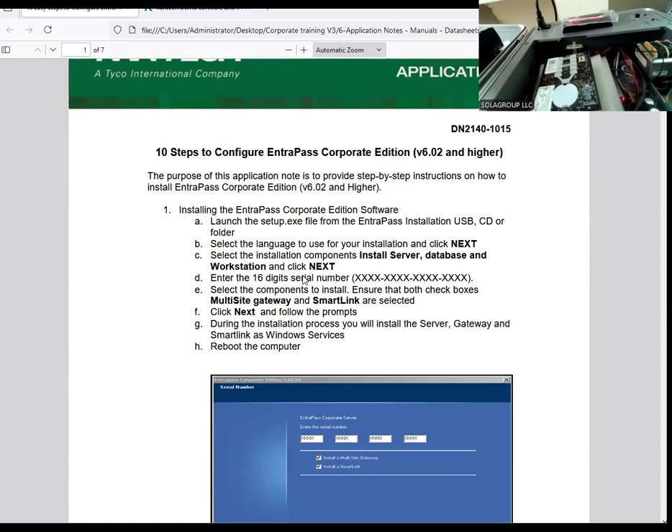Step one is to run the installation software. In the normal EntraPass, once you run the installation software, you're going to get a screen like the one you're looking at here. That screen is where you add the license code.

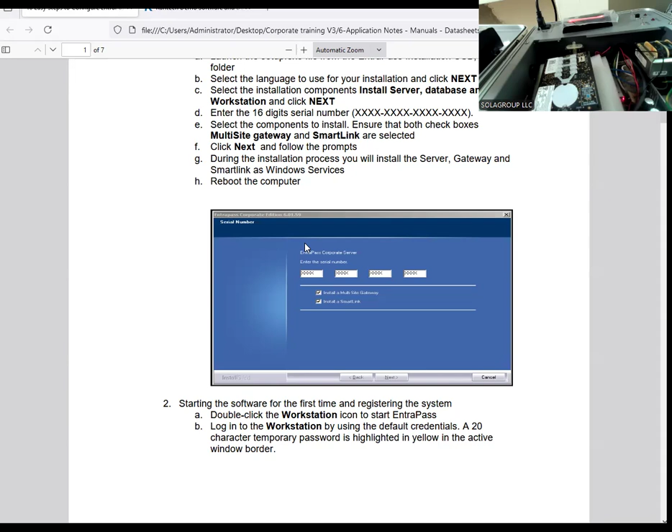So when you buy the kit or the solution, you have a soft license. It comes by email, or if you have the box pack, you have a USB inside with the code. So you add that code and hit next.

After that, I'm just doing a review, so you know this already. When you start the application for the first time, you'll get a funny yellow password. You enter that, it doesn't matter if it's capital or lowercase. After that you hit OK, and you'll end up on that screen here.

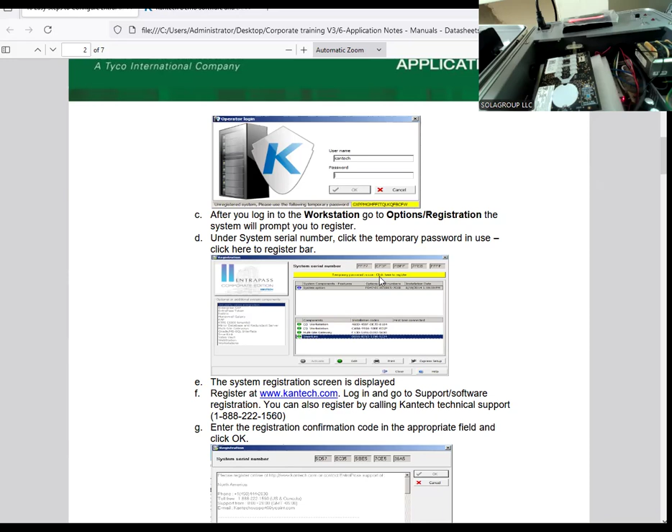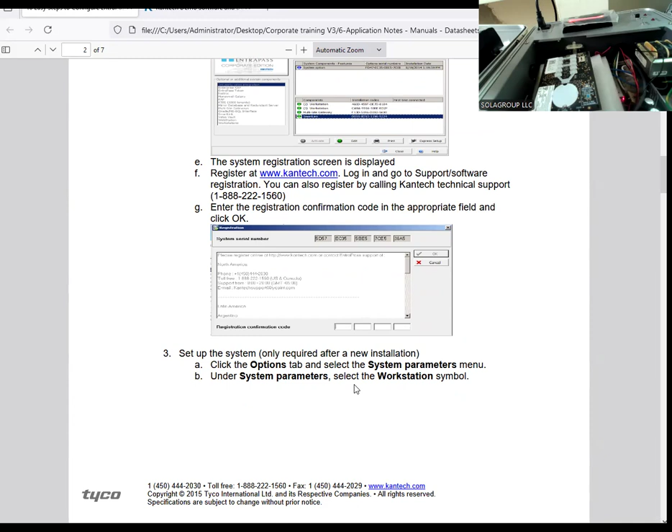There is a button saying click here to register. So then you go through the registration process to get a confirmation code. You enter the confirmation code and you're good to go. I explained that part because since we're using the demo version, this part is not there - you will not be able to see it.

All right, I'm pretty sure the software is downloaded already, so let's get to the download. I even have it twice - yeah, I did download it before.

Okay, so we're going to run the software. We're starting the installation. We're going to do everything together. Let's wait for it. Windows asked, and I click 'yes' anyway.

My software is asking here, showing that we're about to install the 8.51, which is the version available in demo mode - the latest version available in demo mode. That will allow you to set up and do all your tests. You can add a controller, add up to 10 cards. You can even do integration testing with a video system, integration with an intrusion alarm system. You can test your mobile application, EntraPass Web, and EntraPass Go. It is very, very useful, and you can play as long as you want and practice.

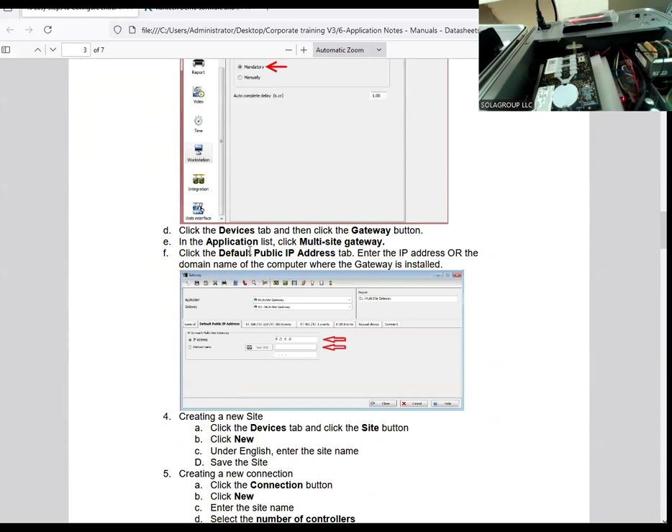After the installation is done, we will start the software. Then we have a couple of presets. We'll make sure, for example, we need to confirm the IP address of the server gateway and add it there. We're talking about the multi-site gateway, the EntraPass gateway. Then we'll start after that with creating site, creating connection, and so on. So that's pretty much after the installation is ready, we'll start the software.

Then we will go to make a configuration. It's a quick config. It's about helping us always get our site and connection at the right location. We'll go to option, system parameter, we'll go to workstation, and we have some options there. For example, whenever we're creating a connection and about to save it, we're able to set the software to ask us, do you want to save that connection in a site? It can ask, it can be mandatory, or it can be up to you to remember. So we can set it as mandatory, so there's no way we're going to forget, because the software will make it mandatory to add the connection to a site.

And so on. Since we're going to see that together, let's see how we're doing here. Still working on getting the software ready.

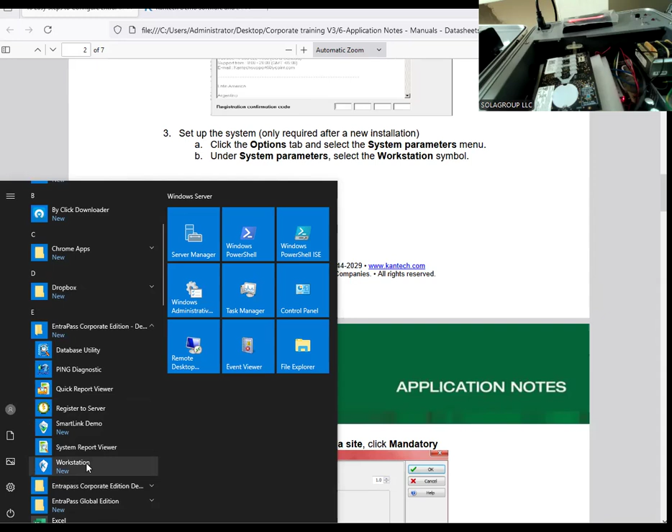All right, everything installed. Now we need to finally start with software setup and configuration. I have a couple of other software there, as I told you, remember. So we'll go with the EntraPass Corporate Edition demo. In that case, all you have to do is get the workstation and run it as admin.

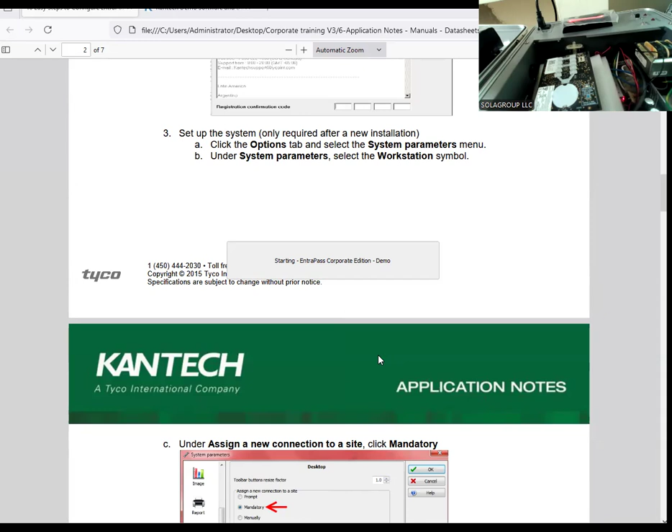We do have another video on how to prepare your computer. I'm pretty sure you know that one, but just in case, we're going to add the link for you so you can review. This computer has already been prepared, which means you need to have local admin rights, you need to add the port in firewall, and in case your antivirus also has a layer of firewall, you need to add the port in and out. All right, so those have been done, but we have a separate video to assist you on that, to remind you how and what needs to be done.

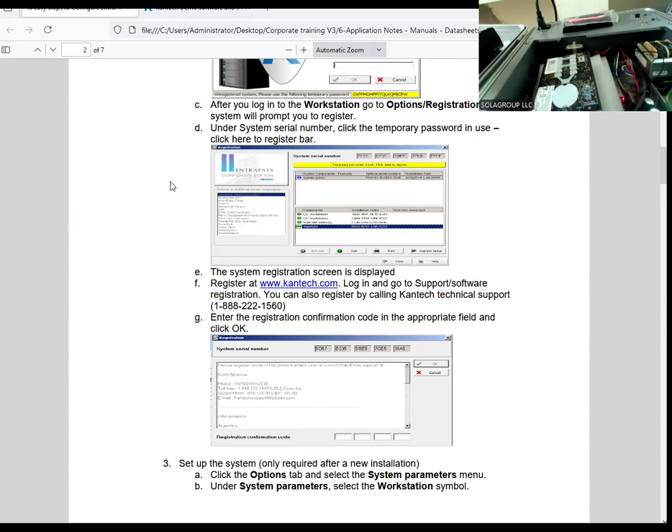All right, so right now we're moving forward and waiting for the software to be ready for us. Then we'll go with those steps. Since, as I mentioned, the demo version doesn't require registration, so we'll go straight into this part here whenever it's ready.

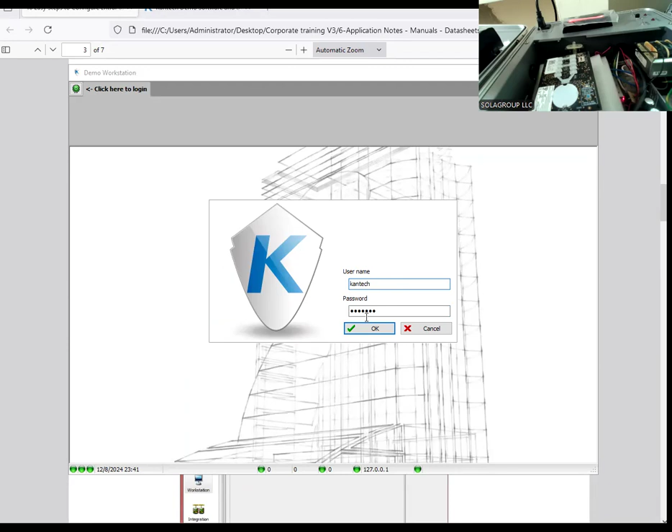As you'll find out when using the demo version, the login information is already added for you. You only have to update your password. Make sure you update your password accordingly, and then you will be good to go.

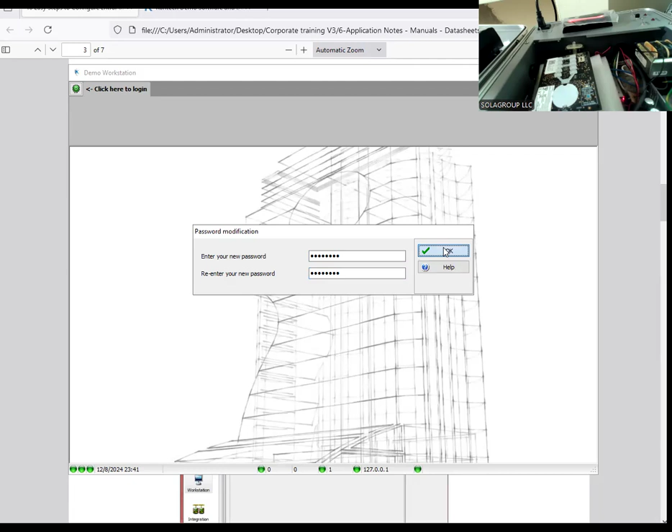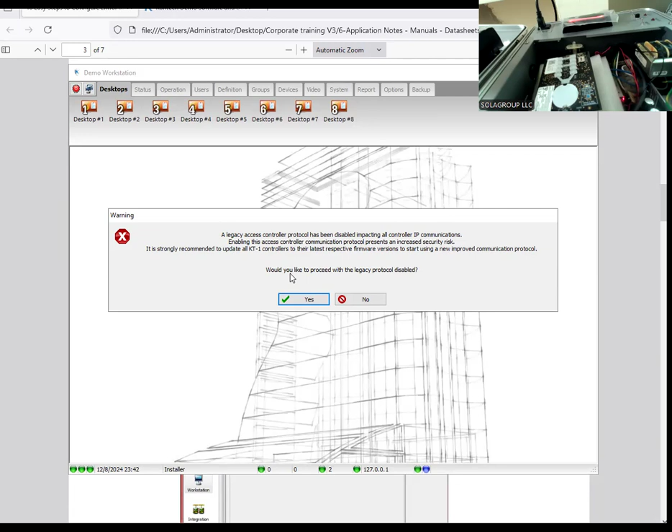Now we have a message here about the legacy controller. If you only have new controllers for KT1, KT2, KT4, or KT400 with updated firmware, you could just say yes and leave it disabled.

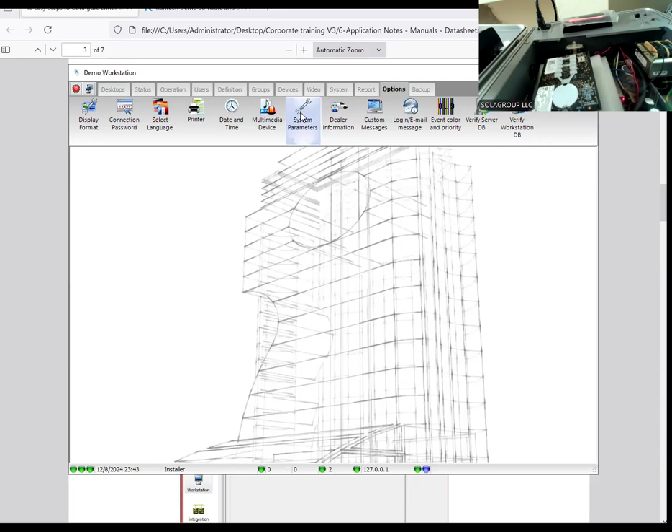Since version 8.40, there's been some tweaking to make the security protocol tougher, and by doing so, the old controller will not communicate. However, if you have older controllers like KT300, you need to go to Options, System Parameter, Firmware, Gateway, and enable Legacy Communication. Enabling this prevents certain security improvements, but by doing that, you will have communication with both older and newer controllers.

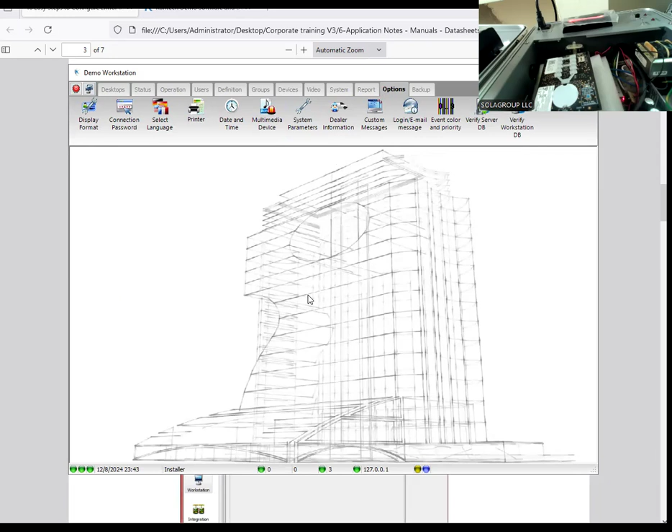Okay, fine. Now let's go and follow the steps. We are at the step to get your system assisting on configuration when creating a site. So we go Options, System Parameter.

We'll go to Workstation on the left, and here we can set it to mandatory, or we can set it to prompt. Prompt will ask you, mandatory will make it mandatory for you to add it to a site. Okay, so we have that taken care of.

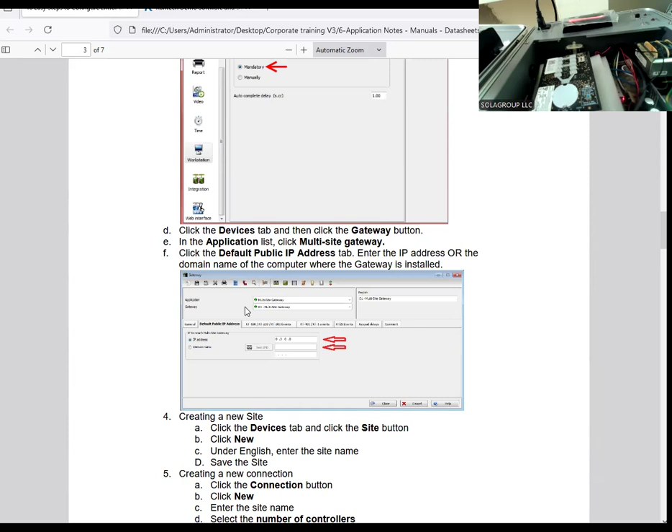Then we need to get our gateway IP. Remember, by gateway we're talking about a component of the software called gateway. So we go Devices, Gateway, and if your gateway is running, you come here. Normally a double click should be enough.

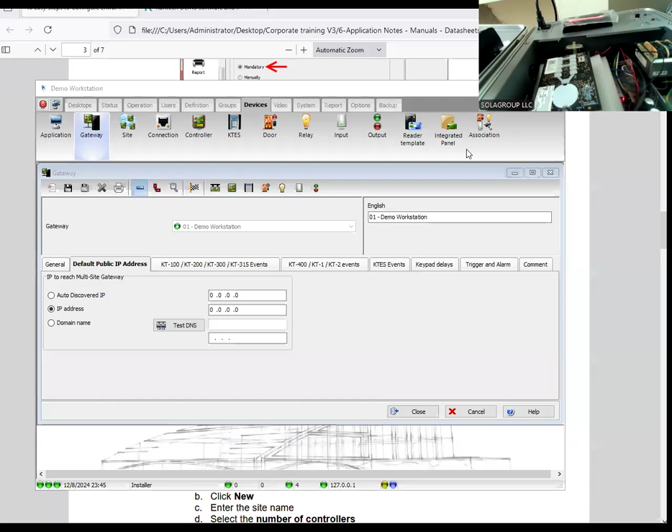Now, if the gateway is not running, you can check the IP. For example, you can do an IP config on your computer, or you can come here and it will show you the current IP detected on your computer. If you have multiple IPs, you will have a drop down so you can see.

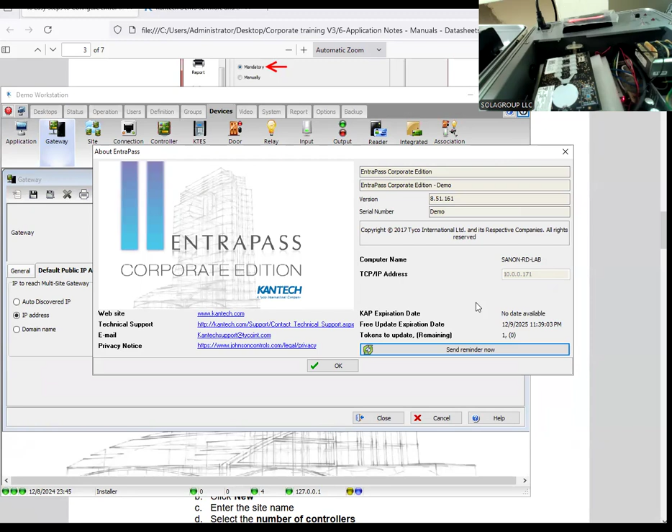So now, whether you have multiple IPs or one IP, you need to select the IP on the network you're going to use. In my case, very simple, I just have one IP. So here I'm going to add my IP information and hit save. That's it for that part.

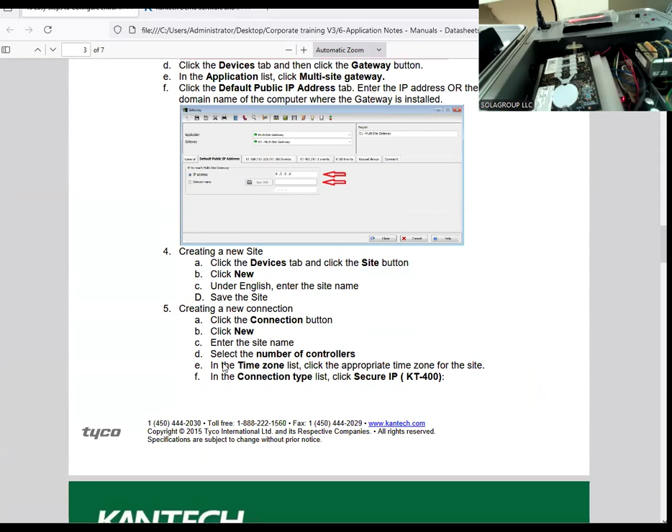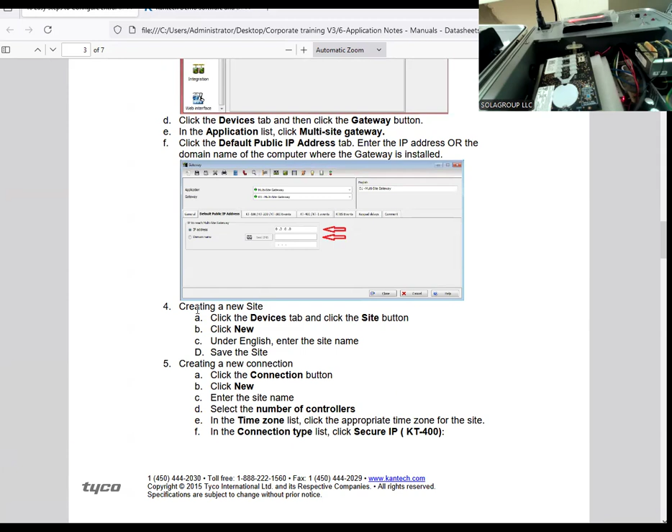Okay, since I'm following the step-by-step guide, what do I have to do next? Then I have to create a site. Remember, to create the site. How do we do a site? A site is a logical component. For example, you have different locations or different departments, and you could group them by site.

In corporate, when I go to Devices, Site, we could have multiple KT1 controllers over IP. Let's make the example differently. For example, we have a 6-door system, and unfortunately, because of distance or rules on the location, we're not able to have the controllers in a daisy chain, inserting one controller cable going to the next and so on. So we end up having to create multiple connections, because every time we have a controller over IP, it is a connection. So what happens is we have one system, one site really, but because of the situation, we're not able to have them in one loop.

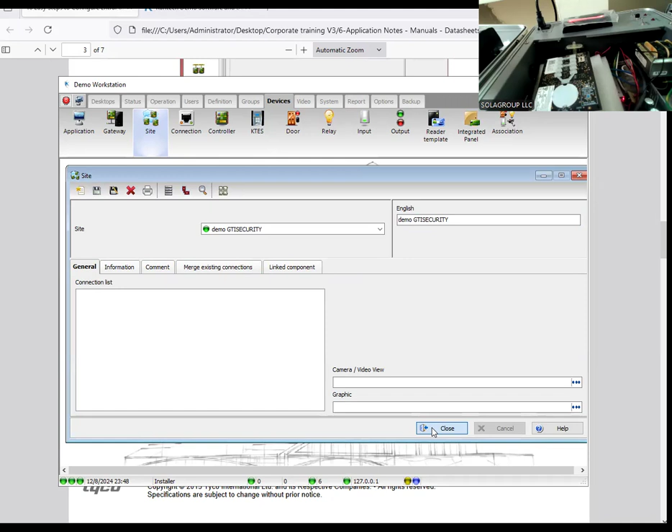So the site is not really a physical component. Like I said, it's a label allowing us to organize and group your connections for better organization, especially when you're going to create access level permissions for users, since those are by site.

Okay, now we're going to create a connection. So I go to Devices, Connection. I hit New. Then I'm going to say the connection is, I have a demo KT1. Okay, so you set your time zone, and here that's the physical equipment that you have.

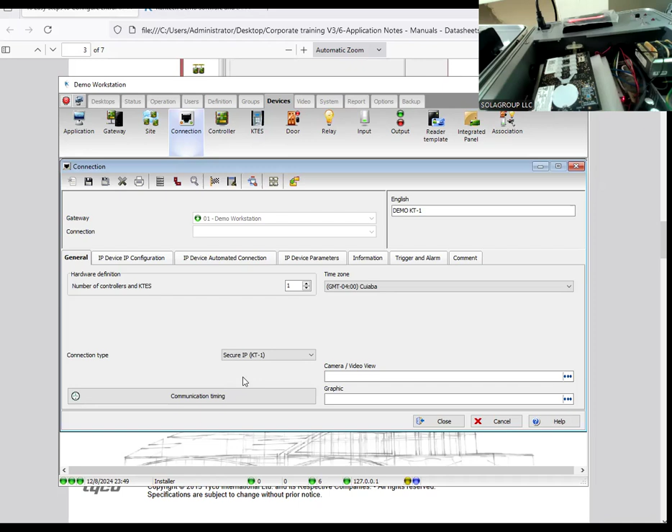MAC address is 5F. I only need the last 3 because the first 3 pairs are always the same. 0E and 53. All right.

Now I check to see if my server IP is correct. Yeah, it's correct over there. Cool. Now I'm gonna hit save, so I'm saving the connection, and here we go.

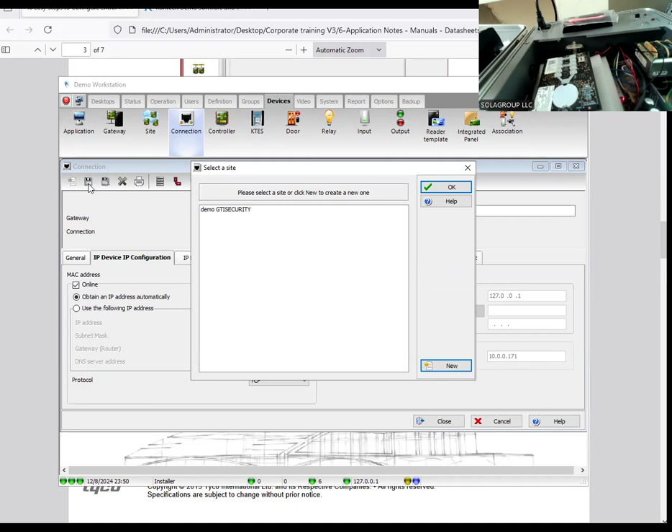Remember, we made a setup at the beginning where we asked the software to assist us, making it mandatory for us to select a site. That's why it's asking you to select the site. If the site was not created yet, we could just select new and create it.

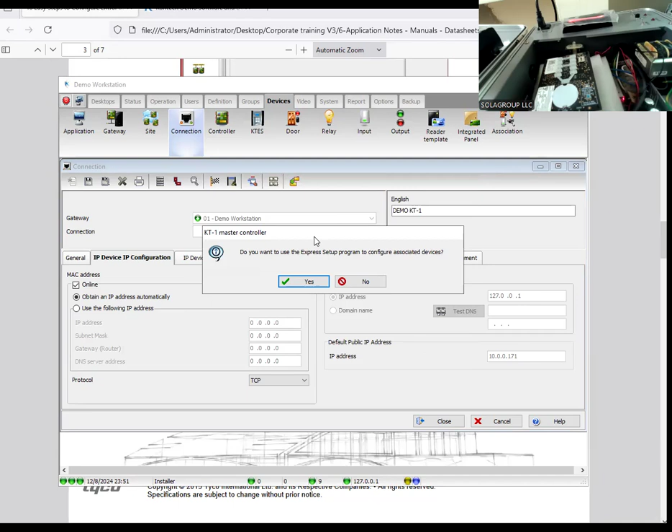Since we had the site already, we select the site and hit okay. Then we have Express Setup. I'm just gonna go ahead with Express Setup because I'm sure you know about it. If not, we'll add the link for you to review, because we have a video dedicated to Express Setup. So I say yes, and I'm moving with the programming.

Now take a look, I'm going to change the name here and look what happened when I change the name. Demo main entrance, for example. So now while I'm adding the name of the door, you see all the related components.

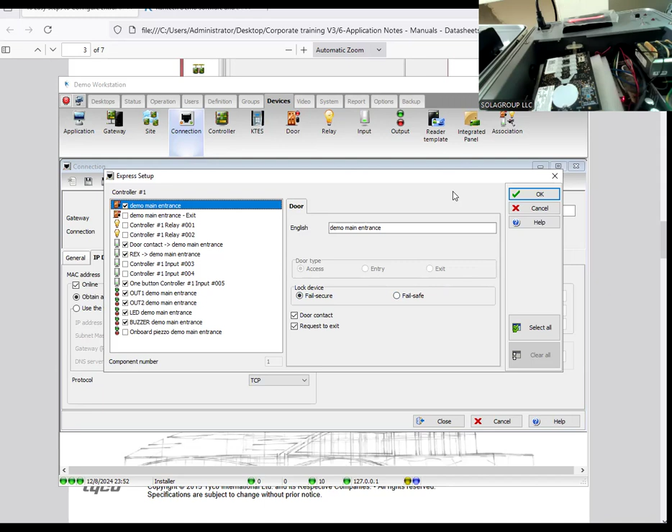That's one of the amazing things in Express Setup and a lot of other things. For example, I could set already what type of lock I have, fail safe, fail secure, everything. We can do everything there while you're in that screen. So since I'm done, I'm gonna hit OK.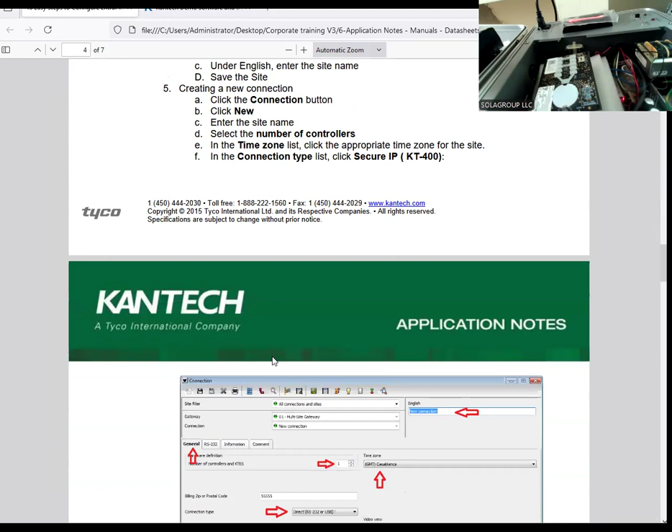And I have my controller, my connection set and ready to go. Of course, we still have to get ready on the communication part. So I have the connection. All right, here is the connection created.

Okay, we had the Express Setup, we just did that, we had that screen here. Since we're using a KT1, the screen was different. The Express Setup screen came according to the equipment that you have. If you have a KT400, it's 4 doors, or you have 4 sets of selections and stuff like that. Okay, then the next step is checking the communication status.

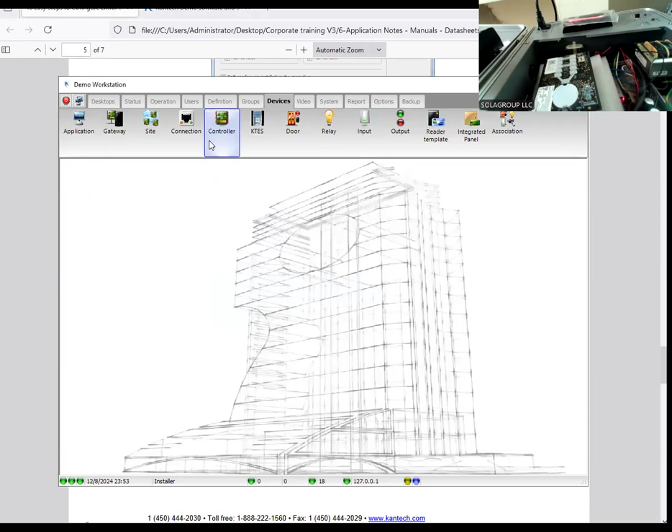We're going to see how we're doing with communication. I'm pretty sure we're not doing so good because we did not prepare the equipment yet. So here I have IP device communication fail.

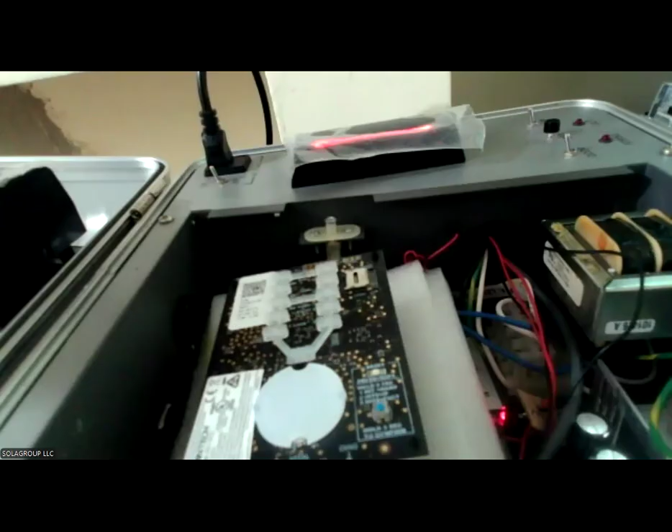That's when we're going to play with, let's see if we can see the camera better. Yep, I'm pretty sure now you're seeing the camera. Okay, I hope so. Let me adjust the camera, then we'll put it back the way. Yeah, I think it's good like that. So you see the reset button and so on and so on.

And we'll be doing prepare the equipment together. Okay, now we're going to get the equipment ready because right now we have to get into the equipment and the dashboard, if we call it that way, to program it. So let's see how that's done.

Normally, if you have one button to do everything in the controller, so I'm going to do what we call a factory reset. The way you do the factory reset is stated in that label here. So we're going to put the controller in programming mode, then we'll make the selection, then we'll confirm.

How do we put it on programming mode? You press and hold for 3 seconds, and the controller will do 5 beeps, beep beep beep beep beep, asking you what do you want. And you're gonna say, okay, I want to do a reset.

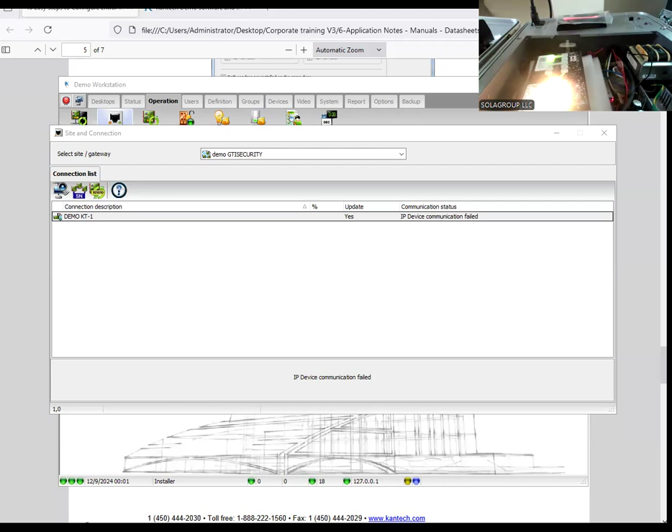All right, so that reset we just did also pushed the controller on DHCP mode. Now, while the controller is on DHCP mode, okay, so now we're going to see what can be done. Since it's on DHCP mode, which means it will grab an IP on my network right now, there are multiple ways of finding what IP the controller got.

We're gonna try some ways. All right, so of course you could use an IP scanner, or you could ask the admin of that network. Oh sorry, HTTP. I'm going to show you something here.

All right, let me show you. No, that's not what I need to show you. No, one second.

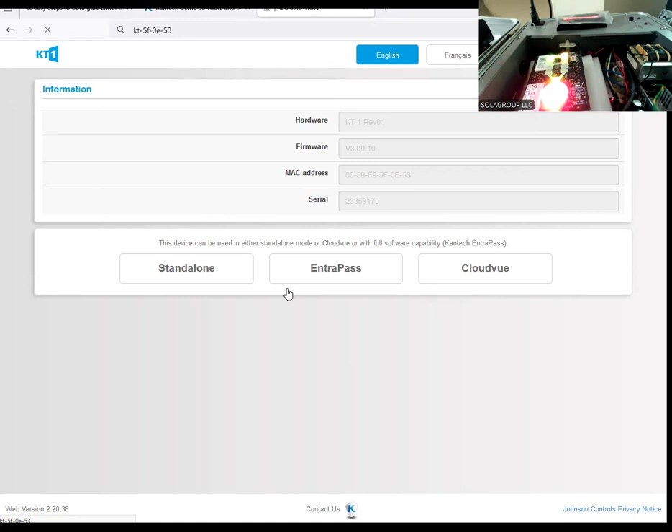So I'm going to type HTTP, then here I type /KT, then the last 3 pairs of the MAC address. In my case, it's 5F0E53. Normally, by doing that, I would get to that page. All right, and it's asking me some setup, you do what needs to be done, and then you access the controller.

Cool, now I am in the controller. How did I do that? I typed HTTP colon /KT dash, and then the last 3 pairs of the MAC address, and by doing that it brings me here. So normally it brings me to a page where I select EntraPass. Then when I select EntraPass, since I'm in the same network, the software already pushed the configuration in. That's why you end up that way.

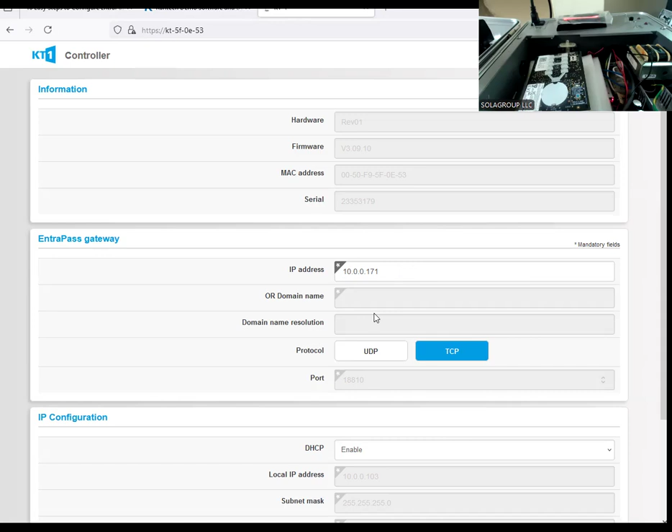But normally I should be having EntraPass, some selection there to make. After the selection, I will add the IP of my server where the gateway is. And since my controller was made on DHCP, I don't have to change anything, and I hit save. That went very fast. Since I'm in the same network and I programmed the connection already, it was able to get in touch with the controller and say, hey, come over here, and I'm already communicating. Cool.

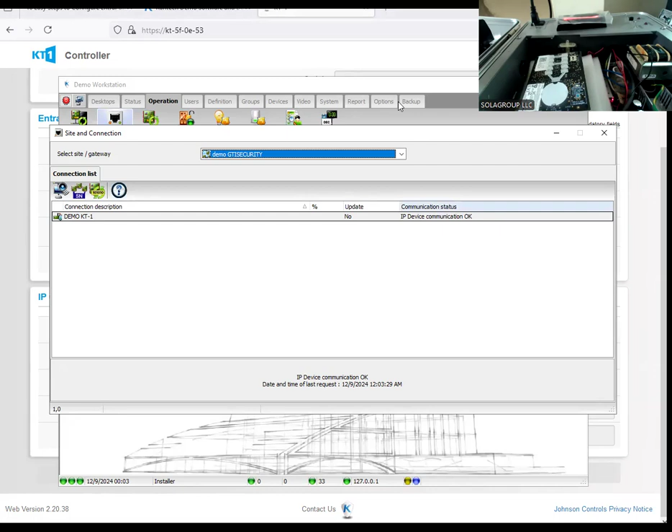So we have the communication. Oops, that's not what I want to do, I want to close this one. So we have communication with the controller. All right, so I have my controller communicating.

I could... let me see... try a card since I have all my wiring and my reader connected, and nothing is happening. Why did nothing happen? Because right now I have my reader connected RS485 to the controller, so I'm still having something more to do. When you have the reader connected RS485, you have to add the reader. There is one more step to do.

I have to go to Devices, Controller, and I will have to add here, for example, the serial number of the reader, because now we're using the reader in smart mode, remember. So on the back of the reader, I have the serial number of the reader, and that's what we're going to add here.

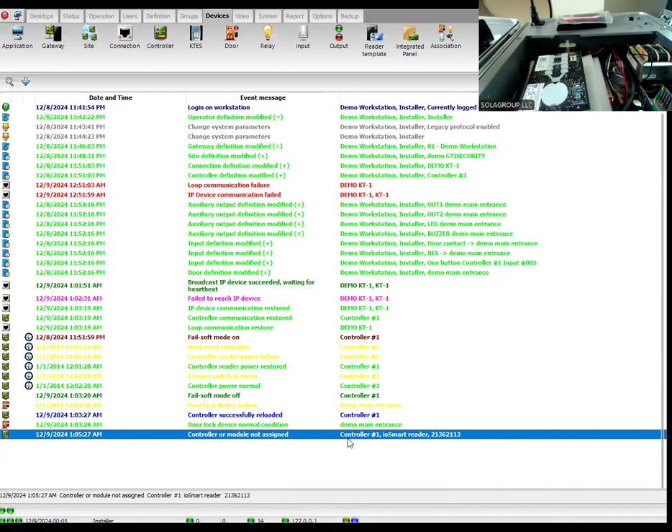Okay, now, since everything is connected correctly, you can see here... you know what, give me a second, let me change this here. I like it better like that. Bang, okay.

So here you see there is an event coming saying controller or module not assigned, and it shows me the serial number of the reader. And since I really like doing right click, let me show you: I go and do right click and I say edit, and I say, you know what, assign. Let me show you what will happen. It will automatically assign the reader to the controller.

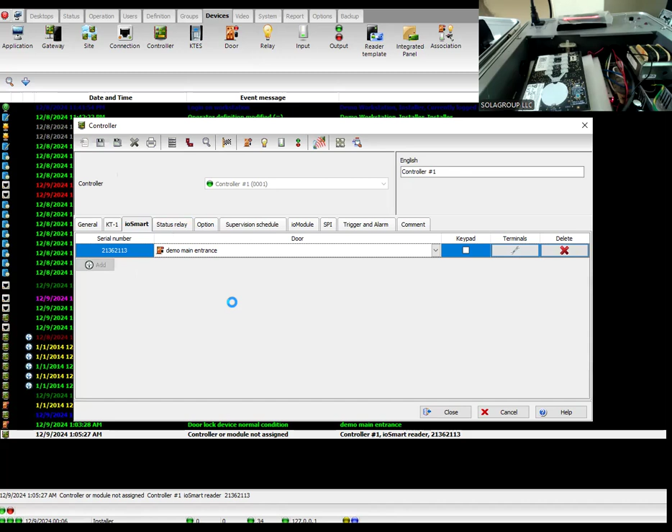If you have, for example, since it's a KT1, I just have one door setup. But if it was a KT400 or a KT2, I would have to select which door that reader belongs to. For now, I don't have to do that because I only have one door anyway. All right, so my reader is added.

Now let's do some cleanup here. For example, here I have something saying controller. I don't like to have my programming with controller 1, controller X, controller Z. We should take the time, it's a couple of seconds sometimes, and add the name. This is KT1.

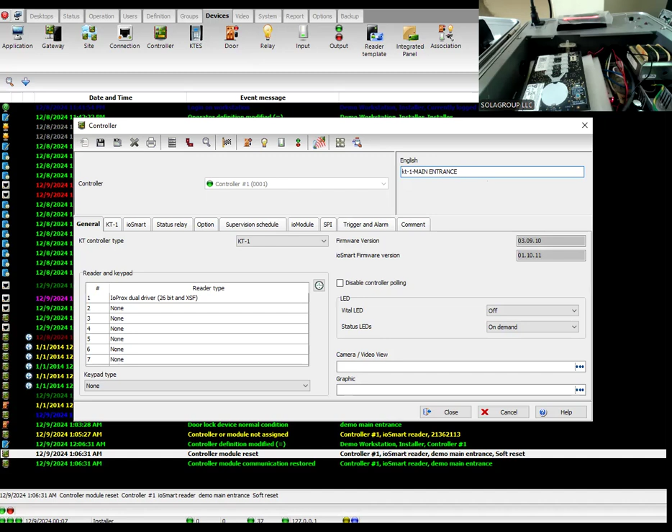And in my case, of course, I'm sure you have your naming convention. Ah, what's happening here? I guess my keyboard... okay, we leave it that way. All right, all right, all right.

Now I'm going to review my controller. I go to Devices, Controller, making sure my format for the reader is okay.

I'm going to add, because I have the IO Smart... actually, you know what, let me add it. Oh, what did I do? Oh, I pressed escape. Let's get back then. I'm going to Devices, Controller, and I have IO Smart XSF. That's what I have right now.

So you set up your reader. I mean, of course, I could do that after. Let's see what's the step telling us. Are we done with this?

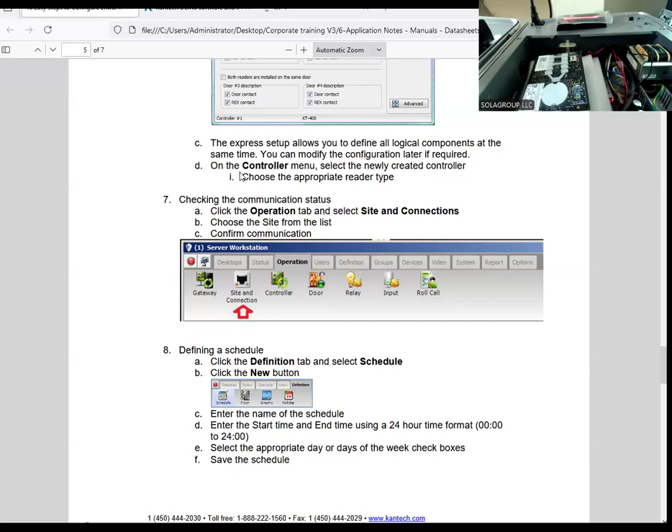Where were we? Here, okay. So we do have controller added, we did verify we have communication, then we're going to move forward with the programming. So right now, review: we have created the site, we have created the connection, we have a connection ready, we have communication. And of course, what would be very useful would be to test. Actually, we can do some cleanup here.

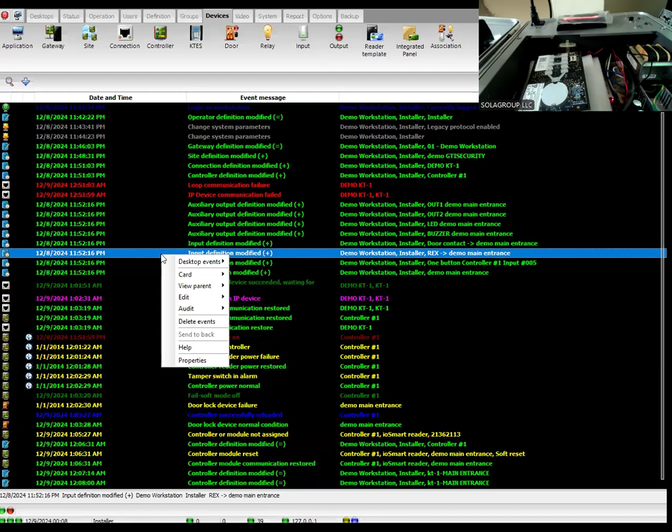We don't need that many. What I just did is a right click and delete event. Those events are just deleted in this desktop, but they're still in your event log for reporting purposes. So I swipe and I have access deny, card unknown, which means it's working.

It's important to make sure all your components work before you start moving forward. For example, here I have the door. Since I have a door contact, it will be wise to force my door and see the door contact is working. Wonderful. I also have an exit button, and request to exit is there.

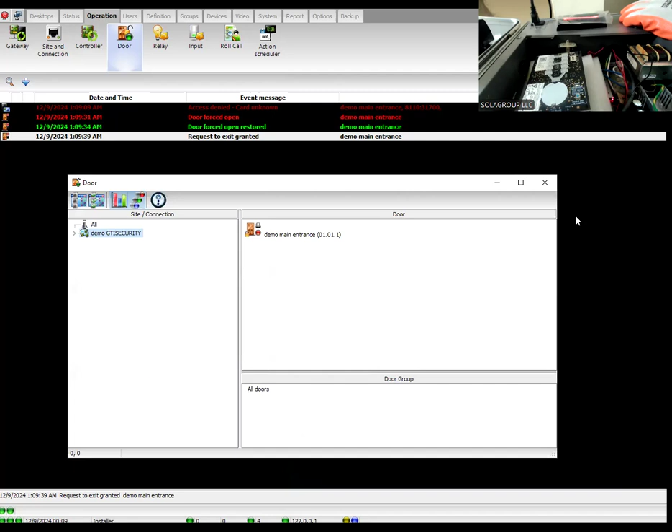So it's important making sure everything is working fine, all your components are working, before you keep moving forward adding more programming. Since everything is working, reader working, door contact working, exit button working, now I can move forward. Let me see what else.

Now, since my system is pretty much set, I have my door online, everything, I have to work on the user, right? People to get in and out. What needs to be done? What are the next steps?

In order to work on the card holder, we need to make sure they have the proper access level. What does that mean, access level? Remember, we are using an example of a system with 6 doors. Let's say we have an IT room, a conference room, the main entrance, a warehouse, and so on. Now, the access level is which of those doors user X or user Y or user Z has access to.

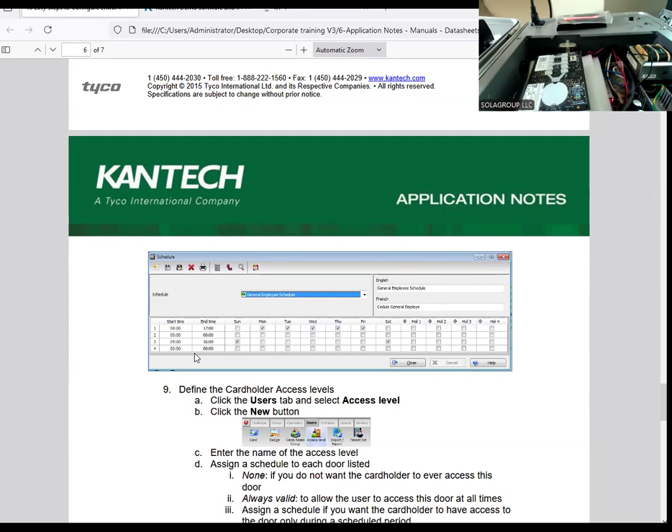That's the access level. Now, before we can create the access level, there is another important component, the schedule. We need to know from what time to what time the person can have access to the door. Maybe that's somebody who can have access 24/7, or maybe someone who can have access only during business hours. So based on that, we need to make sure we have a schedule, and then we'll get an access level, and then we'll be able to create a card holder.

So let's get to it. Let's do a couple of examples for schedule. We're gonna do a 9 to 5, Monday to Friday, and we'll do 9 to 1 p.m. on Saturday, for example. Then we'll do an always schedule, we can call that a 24/7 security schedule. We'll do those two, okay?

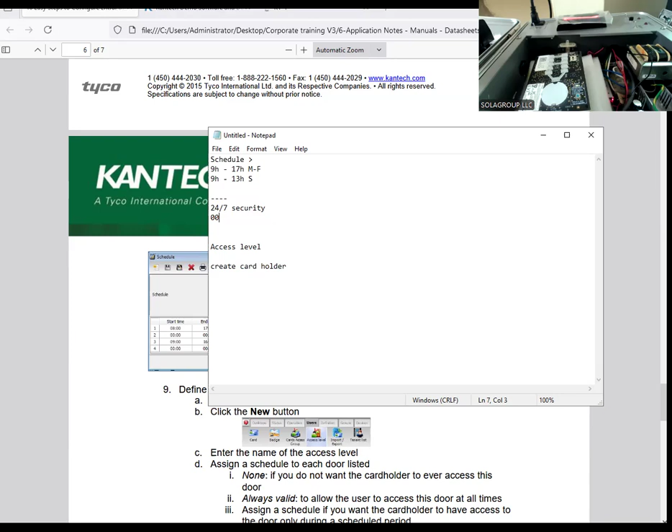Now let's get to it. Where do we find schedule? It's under Definition, and we go to Schedule. Now you already have one there, Always Valid. If you check this one, you cannot modify it, you cannot change it, that's it. It's the default one that comes with the system.

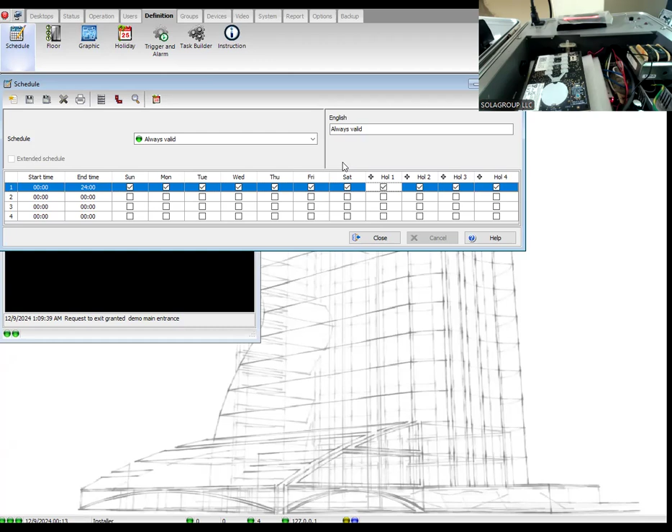If you need a 24/7 schedule for a user, you should create one. The Always Valid schedule is there for components where you really need something that cannot be changed by mistake. For example, if you have the security team, you can assign them that type of schedule, because you don't want an emergency situation where somebody's blocked because they had a wrong access level or a wrong schedule assigned. So for some card holders or functionality that requires it, you could add that.

But for any other situation, create your own. For example, I'm going to create 24/7, all day. So how do I create 24/7? I will do 0000 to 2400, and select every day since that's 24/7, and even the holiday. Holiday, you have 4 groups of holiday. By doing that, no matter if we have a day set as holiday, someone with that schedule on their profile will still have access to the location. Okay, so this is created.

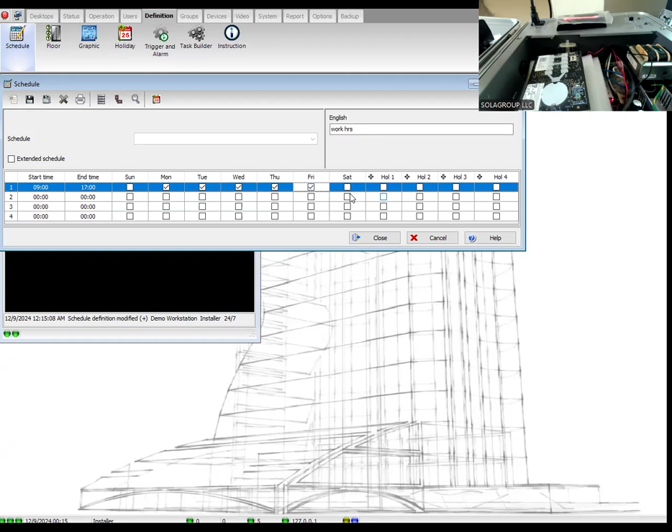Now remember, the other one was working hours. Work hours, we had that 0900 to 1700, Monday to Friday, and Saturday with a different time frame. So for that I'm selecting another, 0900 to 1300, just Saturday, and I save. Notice here I did not select holiday, which means if the first day of the year is a Monday, that person with that schedule will not be able to have access.

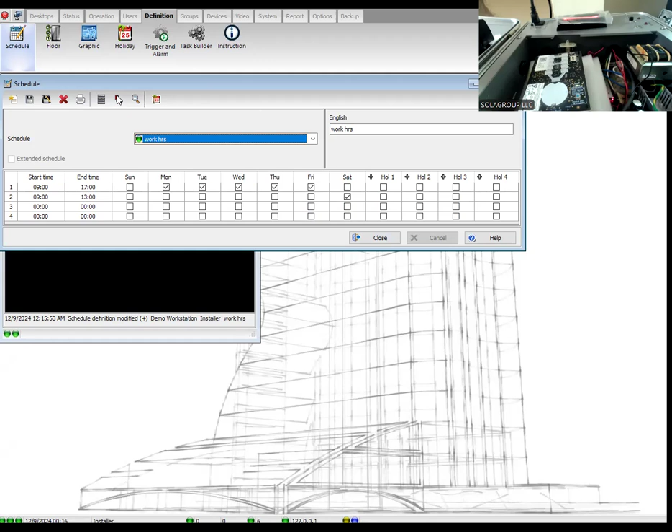All right, so which means we just created a schedule, but you also have something else called holiday. Holiday, that's what we have.

Let me go ahead and ask for some help here. As you see, I'm using it so you know that there are help options. You just click on it and it brings you exactly where we're at.

We are on the holiday definition. Holiday is treated differently than other days. It is recommended to program holidays at the beginning of the year. This helps you modify floating holidays for the current year. Please don't just go in the system and create holidays forever, because sometimes the holiday doesn't end up on the same day. For example, this year it might happen on a Monday, and next year it might happen on a Saturday.

That will help you review what the holiday is and how you can set them up. So I suggest you take a moment and review that.

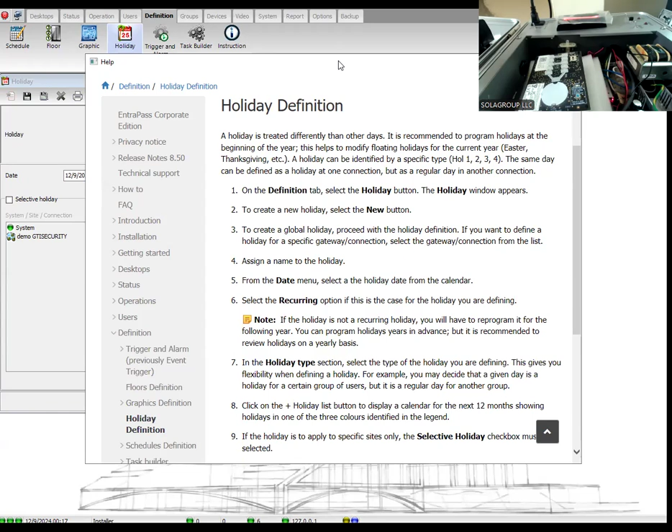I'll just remind you, or get your attention, that you have two main types of holiday: system holiday and site holiday. This is important especially where you have systems in multiple time zones, multiple countries, multiple locations, and sometimes a holiday for you at your location might not be a holiday for another site in a different country or location. So if it's a holiday for everybody, you can create it as a system holiday. If it's just a holiday for some locations, you can create a site holiday.

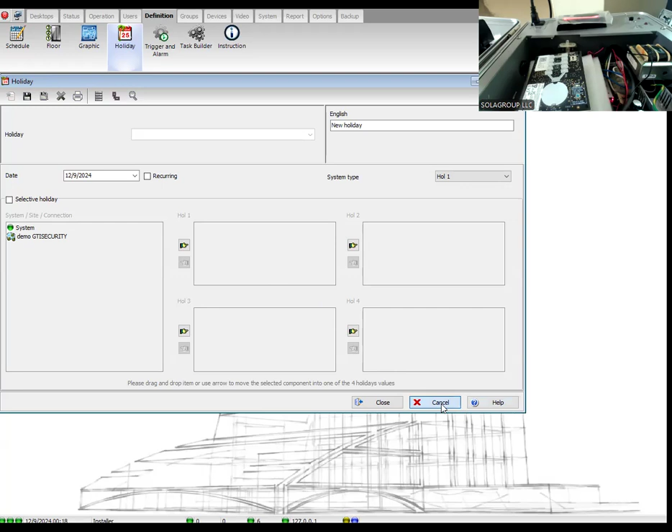But you will see that when you go to the help, you can review the subject further. For now, we do have the schedule created. Remember, we had it scheduled, so we have those two created. Then we're going to work on access level.

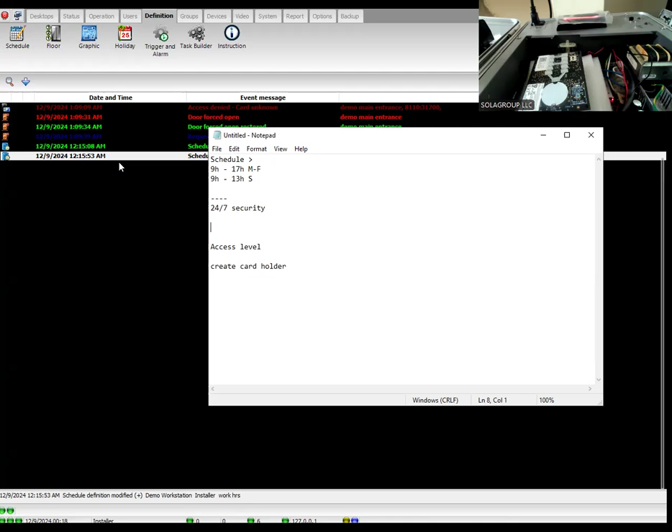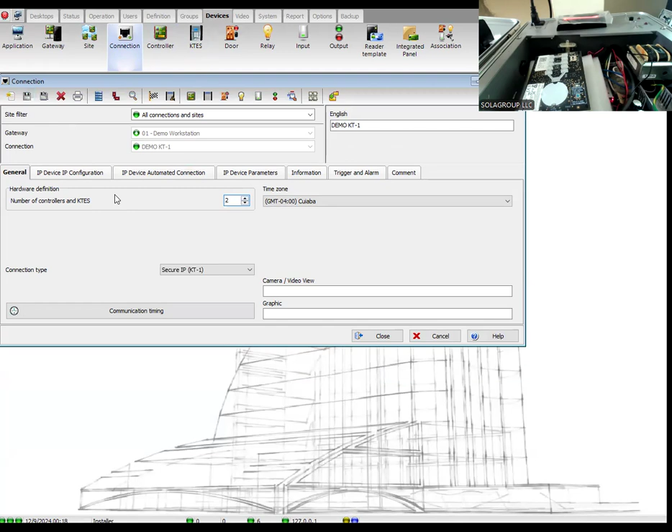All right, so to make it make more sense, I'm going to add another controller, so we have more than one door. Right now, let's see how to add another controller in an existing connection. I just select the connection - a connection can go up to 32, but since I'm in a demo version, it's only telling me two. The demo version allows two controllers. So I have one already.

I am going to set up the other one. Just to have a bunch of those, I'm going to call it KT400 warehouse, so I have to select KT400. Once it says controller in series, you deal with serial number - you need to get the serial number from the controller, but I don't have to do it now. That means you could do your whole programming since you know what type of controller you're going to have, and then add that information after.

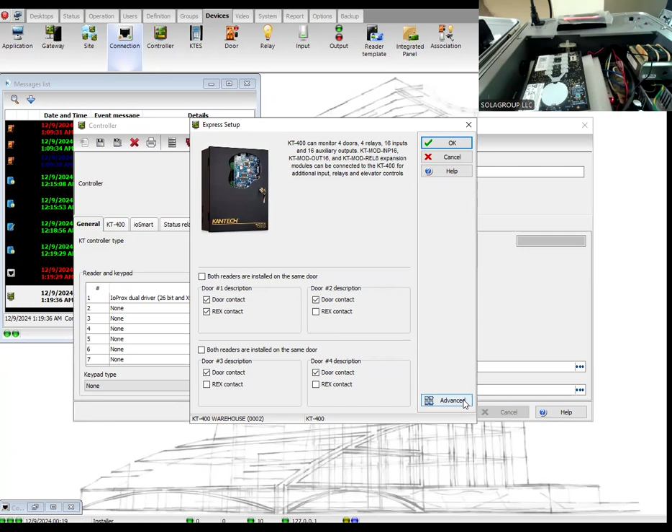Express setup, yes. Let's say I have door contact and REX. I have door contact at all my doors, and some doors I have REX, some I don't. I'm going to click on advanced. Remember, we have a video link, so you just click on that.

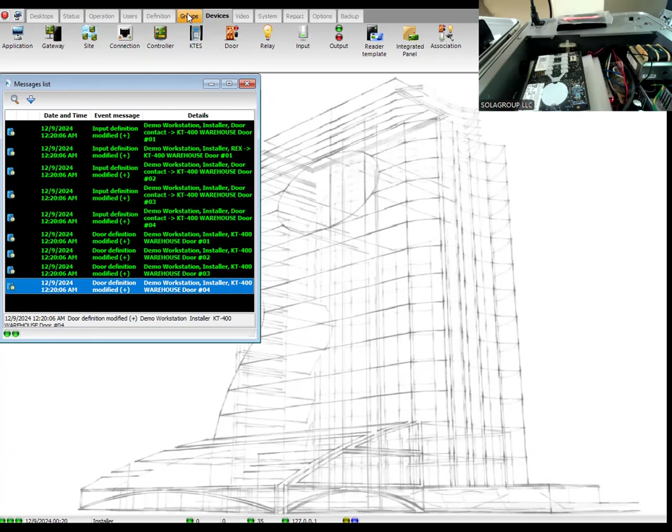So here, that's where you have the door name. You could change the door name and stuff like that. So now I have my door. All right, so I just want a door so we can do the access level with more sense to us.

Where do I find access level? I go to user access level. Remember, the same way you had a default schedule, you also have a default access level, and it's saying always valid, cannot be modified. That's the type of access you will add to the chief of security, or the person responsible for emergency - you will give them those. So there is nobody who, by mistake, just updates something and happens to put the wrong schedule. That will not happen because this is an access level, and the same way the default schedule cannot be modified, this one either.

Which means if you need an access level 24/7, you create one. So I come here and say 24/7 - I'll call it 24/7 all doors, because I did add all the doors. Right? So, done. Then I'm going to create my working hour, work day, work week.

Working hour. Okay, remember, access level is a matter of which door someone has access to. For example, here I'm going to say working hour main entrance. Which means here I only come here and say working hour - someone with that access level will be able to access the main entrance door.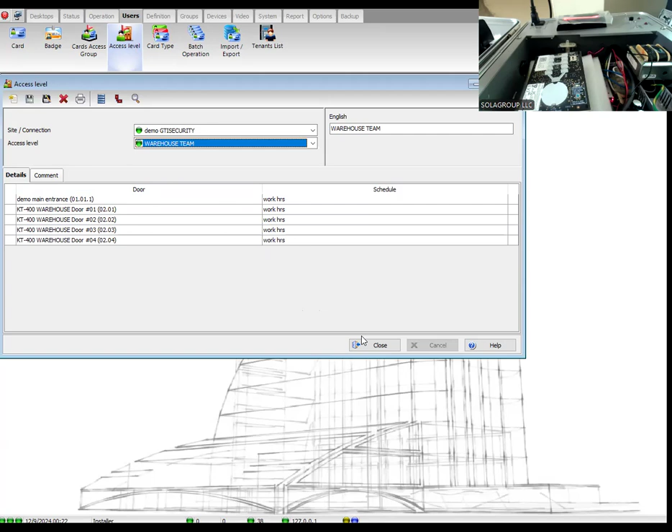So let's get back to the step by step. I have created my schedule, then I create access level, then I'm going to create a user. Creating new user, select the user tab, let's go.

There are a couple of ways you could create your user, but let's go with the 100% usable one. You have the card with you, and you know the card number you're going to assign to the person. So I go to user card, new, and here I'm going to get the name of the person.

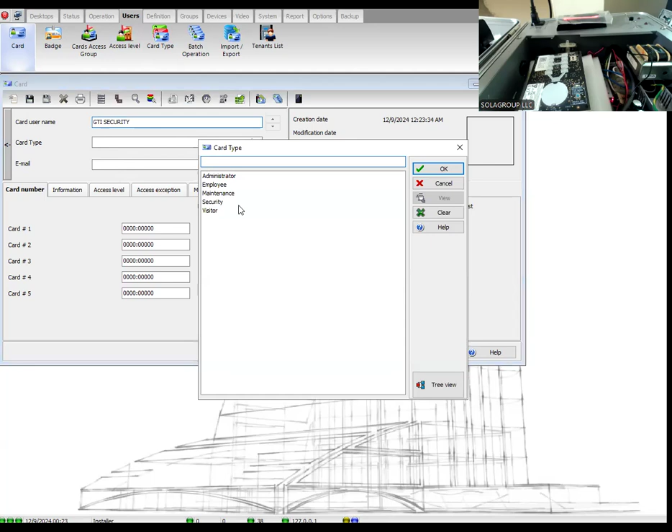GTI, I mean the name of the card assigned to the card. It can be a person or a department. Here I'm going to select card type, please. Very useful. I'm going to send you back to the help, card definition, you take your time and do some reading. You will be amazed by that option.

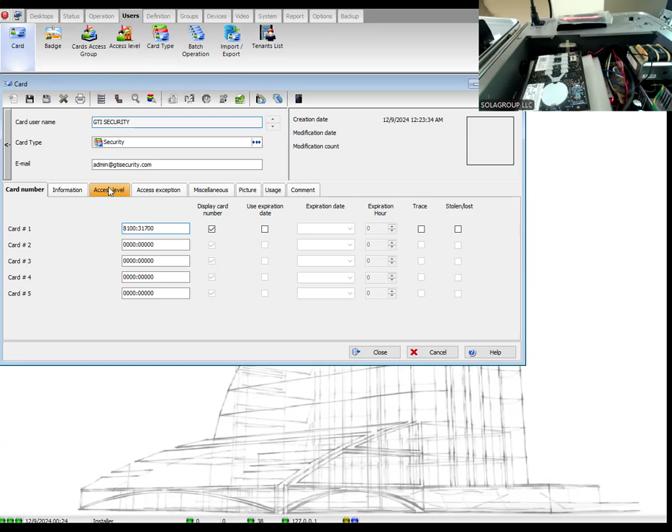Then you're going to add the email, then add the card number. I have the card number with me here, the one you're going to assign, and you're going to add the access level. I'm going to say this is from warehouse, the security team, so it has access.

All right, time of the truth. Let's take a look now, let's do some cleanup, we have quite some events there. And that's the time to swipe the card. And I have access denied, card unknown. Oh, what happened, Jocelyn?

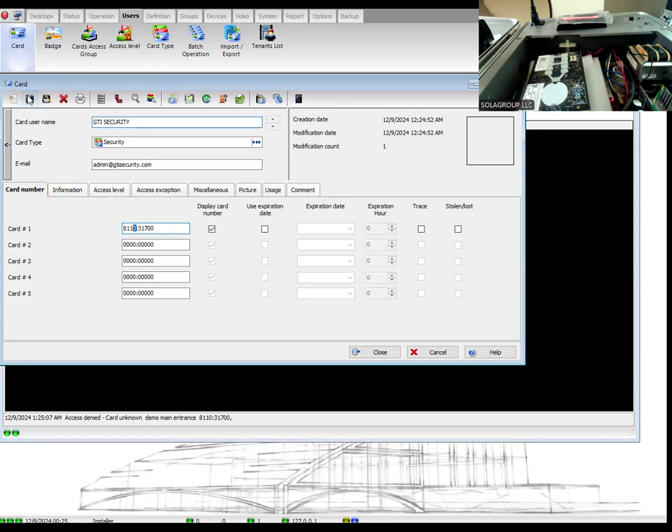I probably made a mistake on the card number, let me check. Okay, I have 8100. Oh yep, 8110. Okay, so that's normal that the card didn't work.

Now I have access granted. And of course, I should unlock the door and lock the door. That's it. So you have your card tested, confirmed, the door is unlocking.

You could even see if I swipe again, you see the window change to green. Let me show you. You should be able to see now. The door first opens, I swipe and the window changes to green. Okay, get back to normal screen.

All right, so the system is ready to go. In fact, we make a backup right after we install the software, and then we make a backup after we finish the programming, so we have backup 0 and backup 1. To make the backup, we go to the backup tab. In the normal software, you go to option, backup scheduler.

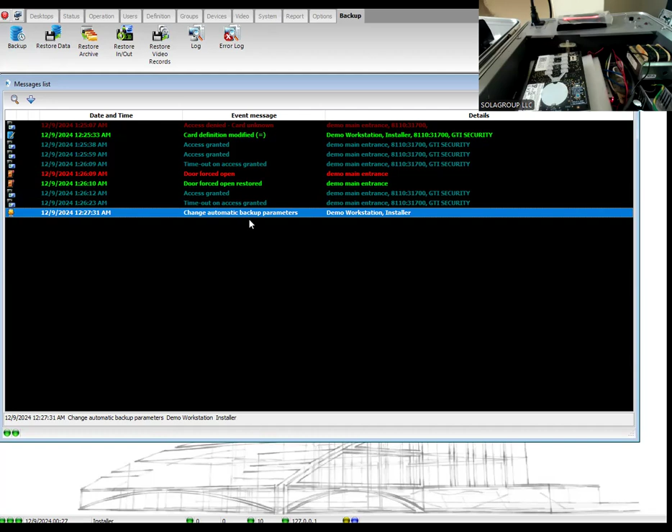And once the backup is completed, please get your USB and make a backup of that backup, make a copy of the backup, because sometimes people make backup every Sunday.

Let me get back to the backup. When I say every Sunday, you see by default it's weekly, Sunday, usually at 00:00 But you could do backup daily, monthly, it's up to you, you could also change the date.

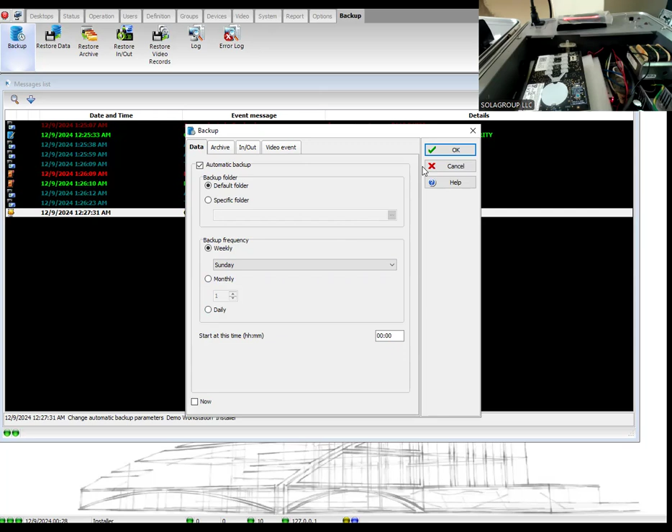Now it is important to make a copy of that backup and move it elsewhere, because if you make backup every week and leave it on the same computer, I'll let you imagine what happens if something happens to that hard drive. You end up with no backup, even if you've been making backup every week for the past 5 to 10 years.

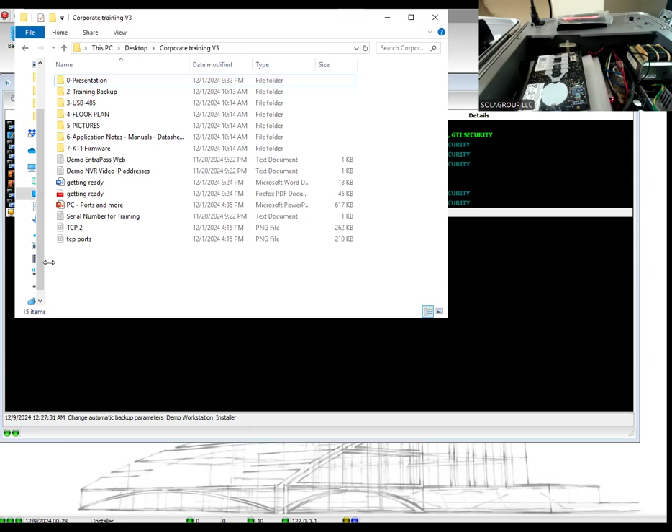Now, where that backup is, Justin, is on the default folder. The default folder means you need to go to the C drive, Program Files (x86), Kantech, Server, and since I'm in demo, I'm going to go server, CE demo, and backup. All right, and here is my backup. So one moment, backup is not done yet, of course, on the demo version. All right, let's see.

I leave it on specified folder and I select backup. All right, but that's how you make the backup, and that's where you will find it when you're on your normal EntraPass. Here we go, my friend.

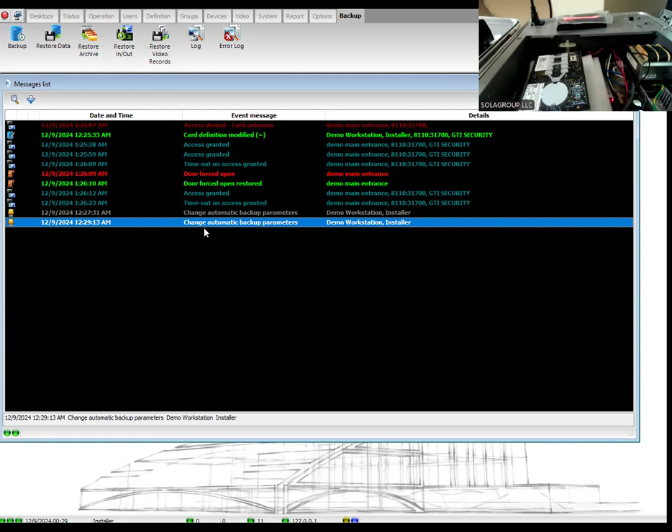So we went step by step. We'll make sure to have a link to that documentation with the details of this recording.